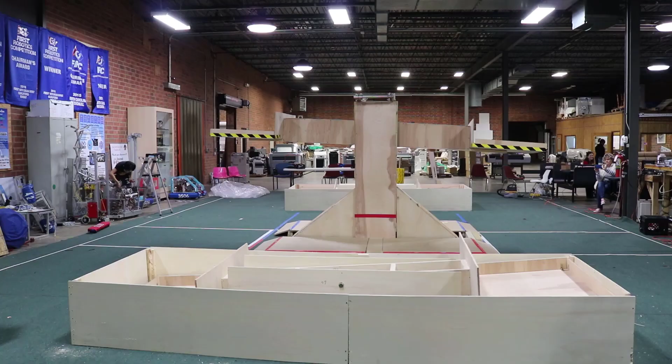West Coast Drive. You may have heard of this system. It is well known in the FRC community as one of the best drivetrain systems ever designed, even earning itself some fame as an easy, incredibly flexible, reliable, and simple to design drive system.

Unfortunately, West Coast drivetrains can be difficult to assemble your first time, as there are not many instructions. Even experienced teams may decide that designing one is not worth the effort. YETI Robotics seeks to change that. In this guide, we will go over some of the advantages and disadvantages of West Coast Drive.

We will then teach you how to design, order parts for, and construct one of these drivetrains from scratch. The West Coast Drive, or WCD for short, offers many advantages, such as being easily adjustable, easy to maintain and repair, and highly customizable. YETI Robotics uses this system because we can finish a drivetrain by day 3, and then immediately focus on other systems. This design is also lightweight and eliminates the need for an outer drive rail.

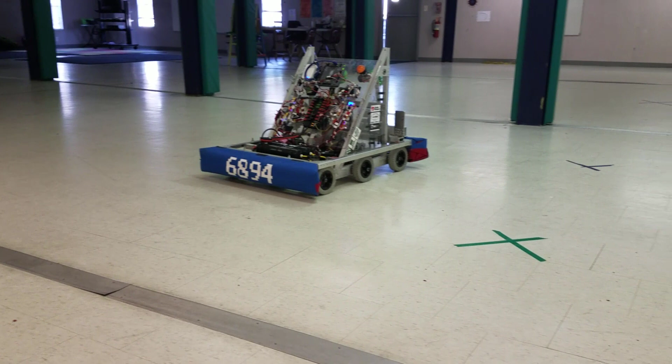One huge advantage is that it does not typically need any fasteners that can come loose because it uses a riveted construction. However, this design exposes the wheels and increases the difficulty of mounting bumpers. Furthermore, it requires higher levels of precision during manufacturing, and while it can be partially holonomic, it cannot be fully holonomic.

The design process of a West Coast drivetrain requires many steps. Firstly, the team must decide on the characteristics of the drivetrain and the type of wheels to be used. Second, the style and ratio of the gearboxes must be determined using JVN's mechanical design calculator. Third, the frame and drive rails must be designed in accordance with the strategy determined by the team and the size constraints of that year's game. Fourth, the belly pan must be designed to attach the frame and drive rails together. Fifth, the hardware and components for everything must be ordered. Finally, everything must be manufactured and assembled.

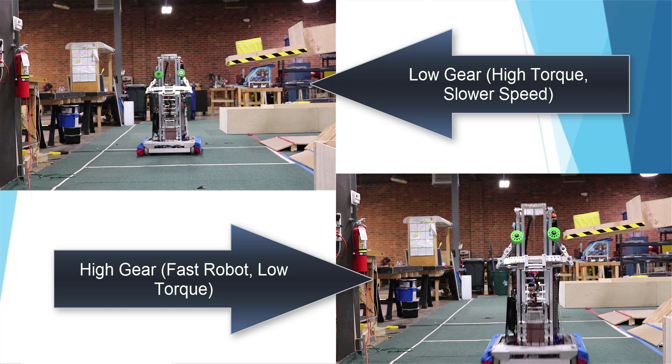During the first step of the design for West Coast Drive, the team needs to decide on what drivetrain characteristics are important to the strategy, such as pushing power versus top speed, small robot versus large, tall versus short, etc. This will determine the main characteristics of the gearboxes and wheels.

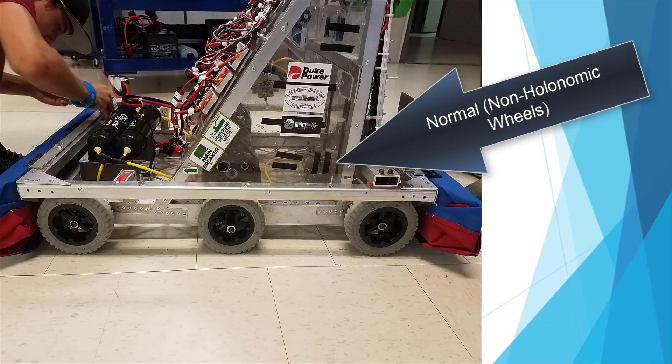There are two main wheel layouts used in West Coast Drive. The first uses non-holonomic wheels on all of the axles, while the second uses omnidirectional wheels on the outermost 2 axles. Examples of non-holonomic wheels include hard slick rubber Colson wheels, traction wheels which have a high traction tread on the circumference of the wheel, and wheels with pneumatic tires.

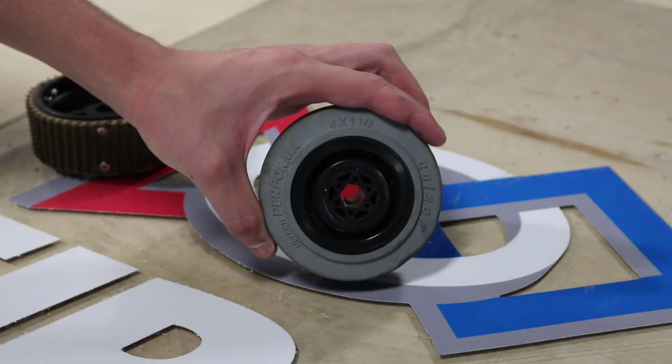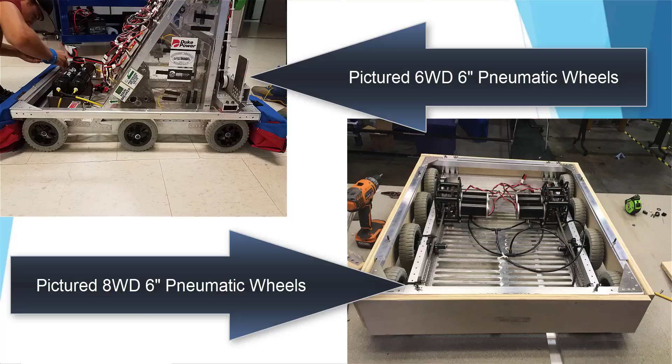It is highly recommended that you do not use Mecanum wheels on a West Coast drivetrain. Due to the design of Mecanum wheels, they will not work as intended with the gearbox. The number of wheels is also important. The most common West Coast drivetrains include 6 or 8 wheels, while some may include 10 or more, although it is uncommon. West Coast drives can also have multiple gearing ratios that shift like a car.

The process YETI uses to design the frame is simple. We create a box in CAD that represents the frame perimeter shrunk a half an inch from the perimeter rules first. This will represent the allowable working area for the drive frame. Then we begin placing components on the system.

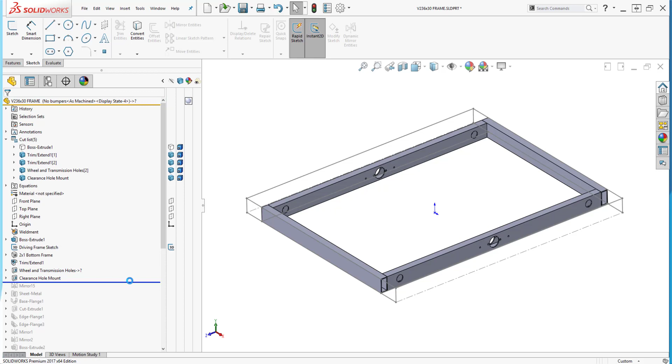It is crucial to determine the placement of gearboxes prior to construction of the rest of the drivetrain. This involves determining whether the gearboxes must be placed behind the center wheels or behind other wheels in the front or rear of the robot. The gearbox can serve as a counterweight to any heavy components of the robot on the opposite side of the drivetrain. Next, the physical parts must be placed in CAD and clearances to the ground and center of gravity must be checked to ensure that the gearboxes are in acceptable places on the robot.

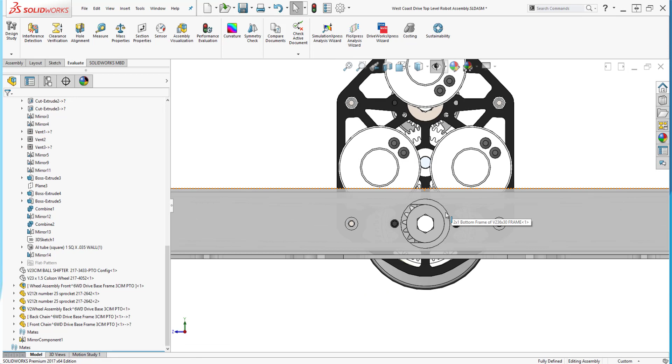Once the drive rails have been designed, place the gearboxes, the battery, and all VexPro components onto the drive rails. This includes the mounting blocks, which hold the axles onto the drive rails, and the tensioning cams, which tighten the mounting blocks in place. And then lastly, the wheels, to make sure that they all line up and that the frame will not bottom out on any field elements.

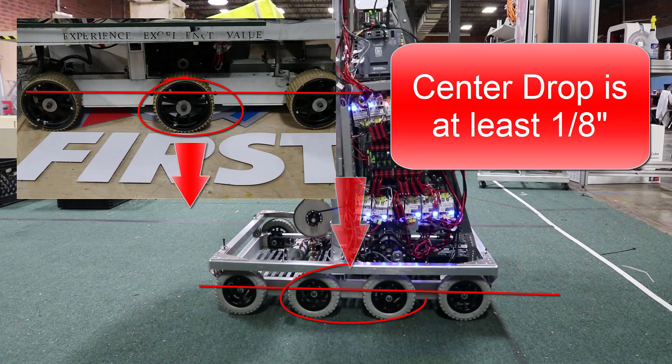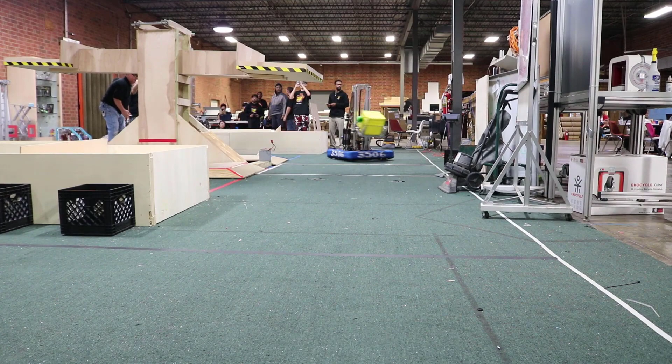The drive rails are the rectangular metal tubing that hold the gearboxes to the drivetrain. These must be very precisely designed and must include a dropped center on the wheels if not using holonomic wheels. A drop center is where the center wheel, or center 2 wheels if designing an 8-wheel West Coast Drive, is lower than the other wheels in the drivetrain, usually by 1/8 of an inch.

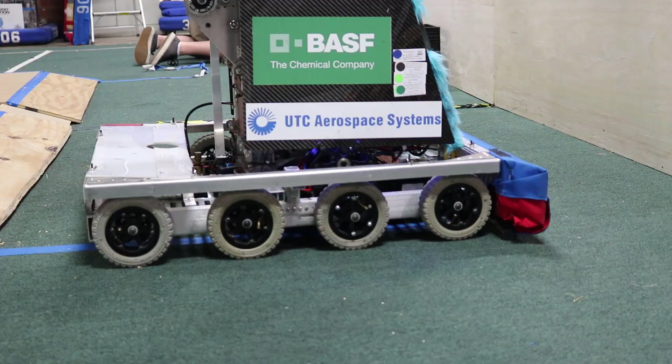This is done to prevent scrubbing of the outer wheels, a problem that occurs when there is no drop center, and all wheels drag against the ground as the robot turns. This could cause several things. The tread would start to wear down, the robot might wobble, and the robot may not turn properly. The motors may overheat, and the gearboxes might undergo serious strain.

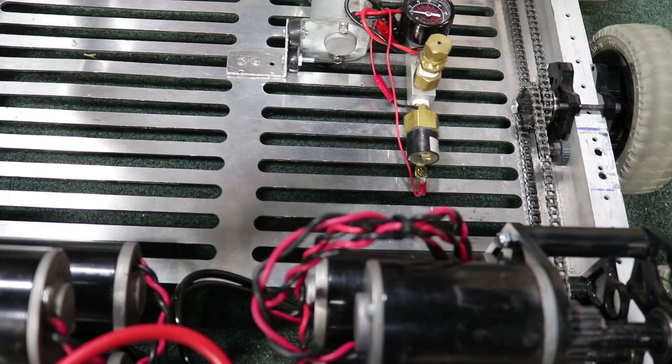Next, the belly pan must be designed to hold together all the drive rails. It is recommended to pocket this plate to reduce weight, but still strong enough to ensure that the frame does not flex. It may also hold the electrical components of the robot. If this is an issue, buying expanded aluminum sheet would also suffice.

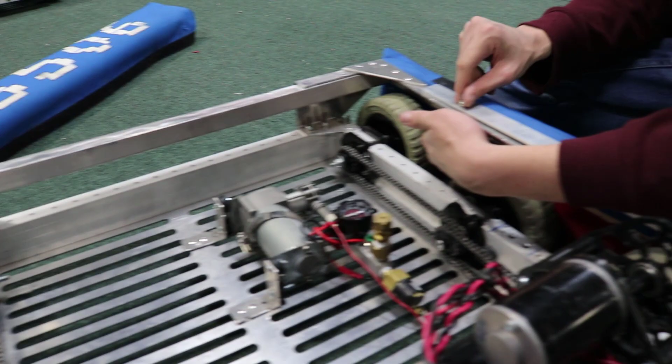Finally, all the components must be ordered. This includes the gearboxes, motors, tubing for the drive rails, and the belly pan, which may have to be machined using a CNC router, laser cutter, water jet machine, or other tool.

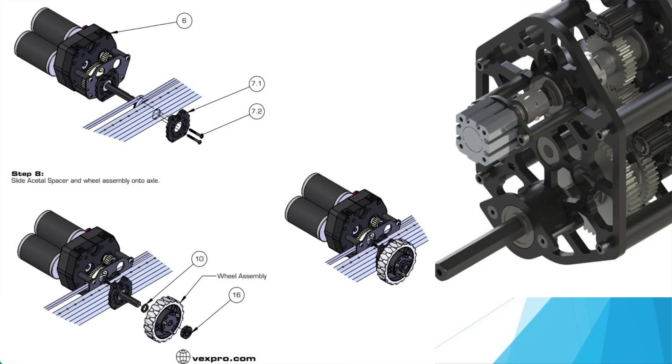Depending on which gearbox you selected, it must be ordered from a different company. VexPro and West Coast Products both have the West Coast Products dual-speed and single-speed gearboxes, and the VexPro 2 and 3 CIM ball-shifting gearboxes, as well as any VexPro components required. The motors can also be ordered from these two vendors, but the metal tubing for the drive rails and the sheet metal belly pan can be acquired from several different sources.

Creating this guide for the community will hopefully spread the idea that it is easy to make a West Coast drive, and that it is obtainable for many teams. Check out the next few videos in this series to learn how to create one step by step.